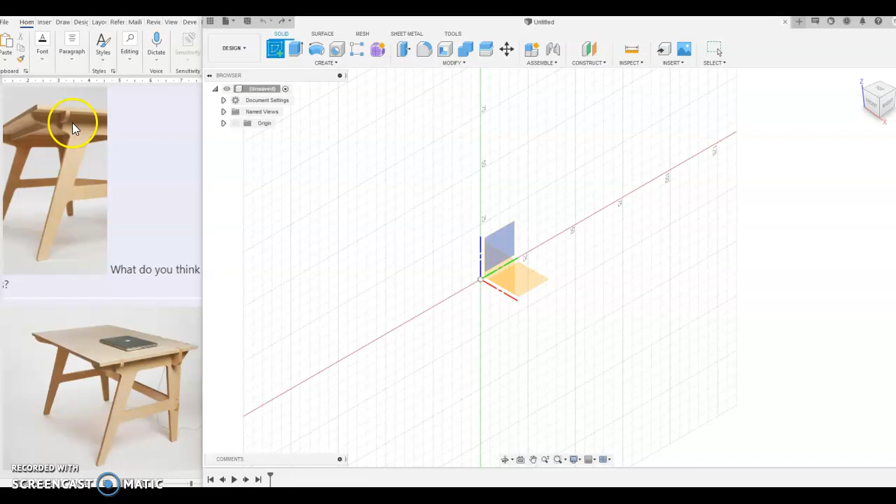Going to have a go at modeling up a plywood desk. This is designed for CNC. We're just going to do a basic leg first and see what we can add to that.

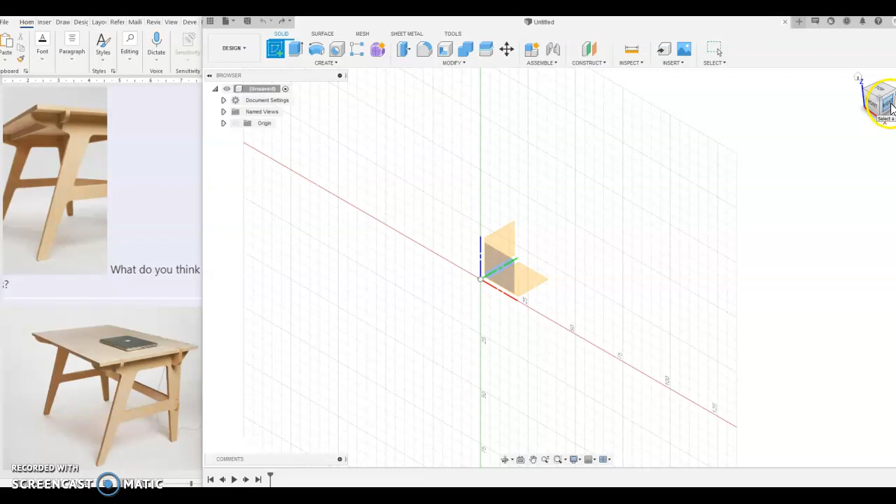I always like to look at when I start a new sketch where I'm modeling. So as a new part, we need to choose the plane that we model on. If it's going to be a desk and it's going to be the side, you want to try and choose one of the sides. So this is the right view, so I'd choose that one there.

So it's sitting in the right orientation to start with. Next thing I'm going to do is do a rectangle to the size of what the legs are going to be. I selected line type construction line, so it's going to be a dotted line here.

Now I need to know the overall height of that leg. So it's going to be the leg height minus the thickness of the top will equal the overall height. So if I want my height of my project to be 720, and it's a 15 mil top, I'm going to put in here 705 millimeters because that will equal overall the size that we want.

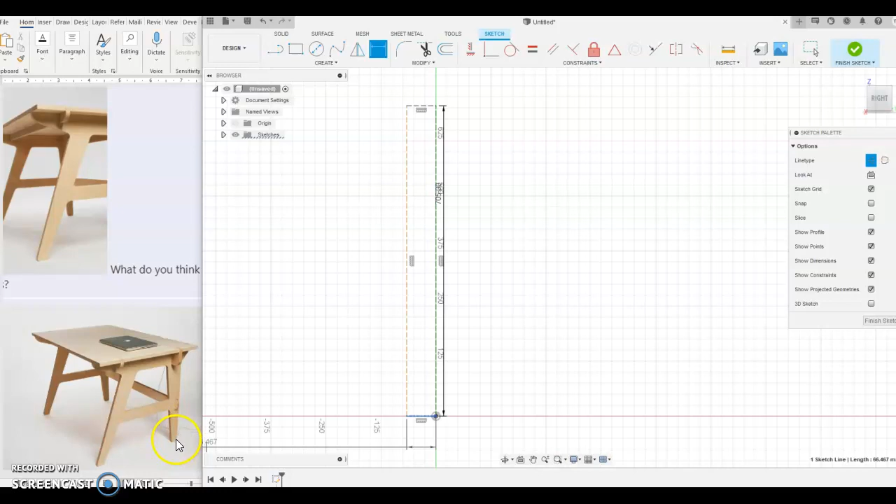I haven't really put much thought about the measurements, but we can come in and change them later. The next thing I'm going to do is the overall width of our project. So from the bottom here to the bottom at the front of the leg, there might be some overhang, so overhang the back a little bit and overhang the front.

So let's think about 500. Don't want it too deep a desk. So our project will sit in there.

I like to press escape and bring my measurements down to the right point, just so we can easily go in and modify them later. So we can't extrude that yet. We need to draw the profile in here now.

You can see this project here's got a very straight back leg and it kicks out a little bit at the back. It's just slightly hidden in there.

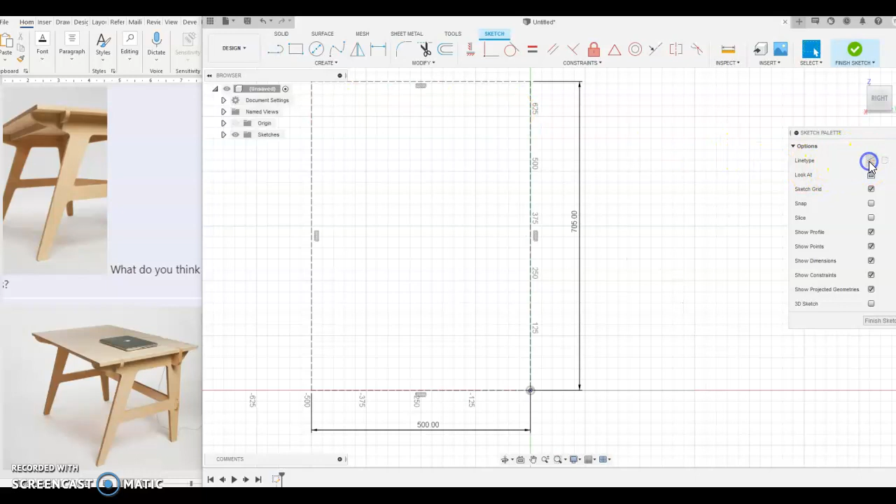So what I'll do next is I'll come in and I'm going to start kind of here. This is a straight leg. Press escape and turn off my line type as construction. So up, and then it's going to kick out at the back like that.

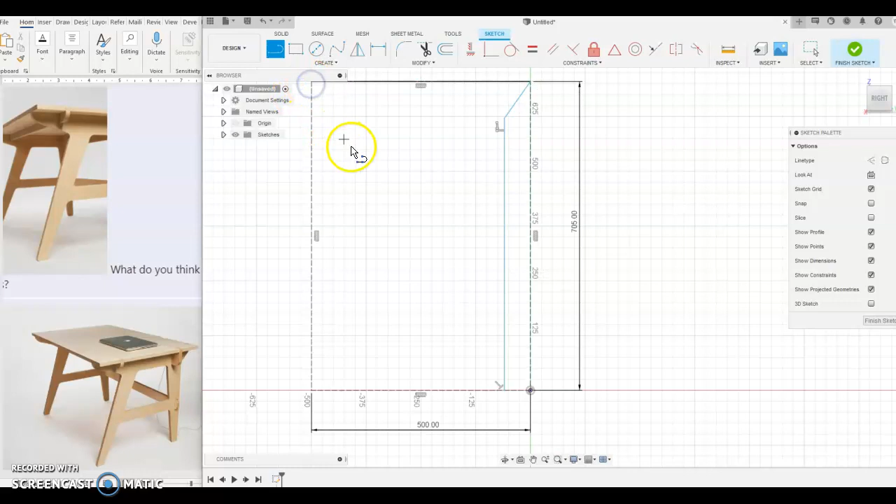We can move these still, so nothing's connected in properly yet. It's nice to be able to do that, especially when you're making like a project like this, which is meant to be aesthetically pleasing. A line to the top, you can see that that's gone black now, so it's not the dotted line.

I'm going to come down, straight, and then I'm going to come out. So I'm just trying to block it in roughly to what I see at the moment. So I'm not really designing, I'm just copying this one.

This one here, I've decided to do it slightly different, so I'm going to delete that line and I'm going to just come down slightly and then over, because I don't want to round this top edge, but I want to round this one later.

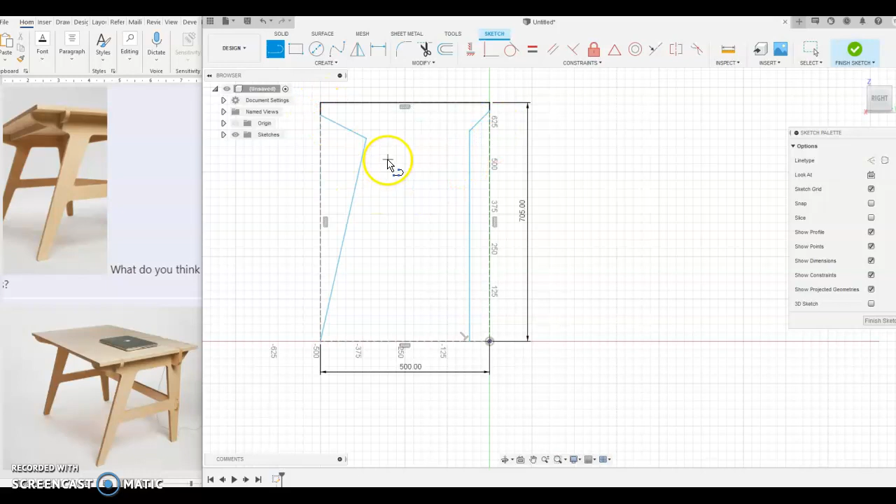Now, the next thing that would be logical for me would be to put a construction line in between those 2 points there, and then with my horizontal constraint, I'm going to click that, and that kind of levels things up.

Next, I'm going to put in a little flat there. Sorry, I still had construction lines on, so I'm going to Control Z until I undone that, and I'm clicking there, and we'll go up.

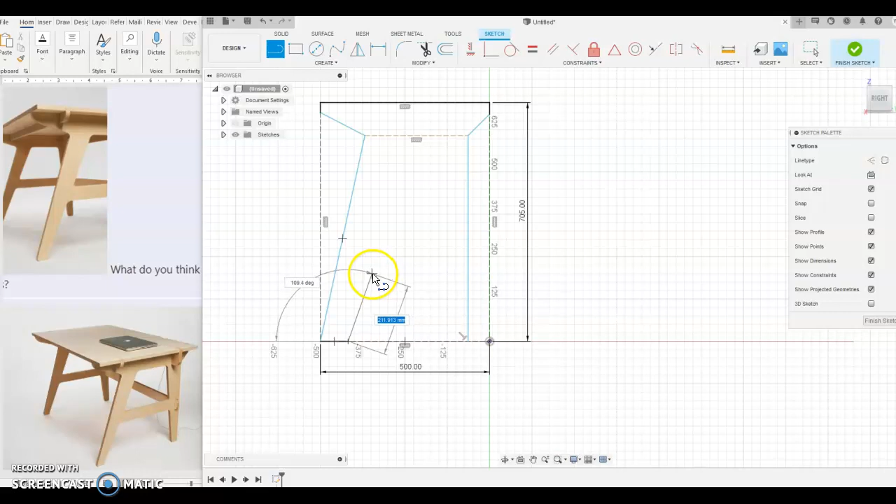So you can see as I pivot around, the parallel constraint automatically connects. There are those two little lines in here. I'm going to go straight like that, and now you're getting those smart constraints pop up. I'm going to come straight down, and then I'm going to join the two at the bottom. That will go dark blue because it's been our profile.

Next thing I'm going to do is I'm going to draw this kind of internal part here.

You can still move that until you've got the parallel constraint. If you don't get the parallel constraint, you can block it in, and then add the parallel constraint to those two there, and that still moves. So we're going to use the collinear constraint between those two. Now those two move together. Those two don't move together, so we can use collinear in there too.

The last thing I would do for this sketch is go into the dimensions, and I'm going to click between those two lines. Now I'm not too sure what this is going to be like, so let's try 80 mil. We can come back in later.

I've just noticed on this here, what looks good is it tapers down from thick here to thinner here. So I'm going to delete both of my parallel constraints. It's still collinear though. I'm going to delete the measurement here, and I can do this here.

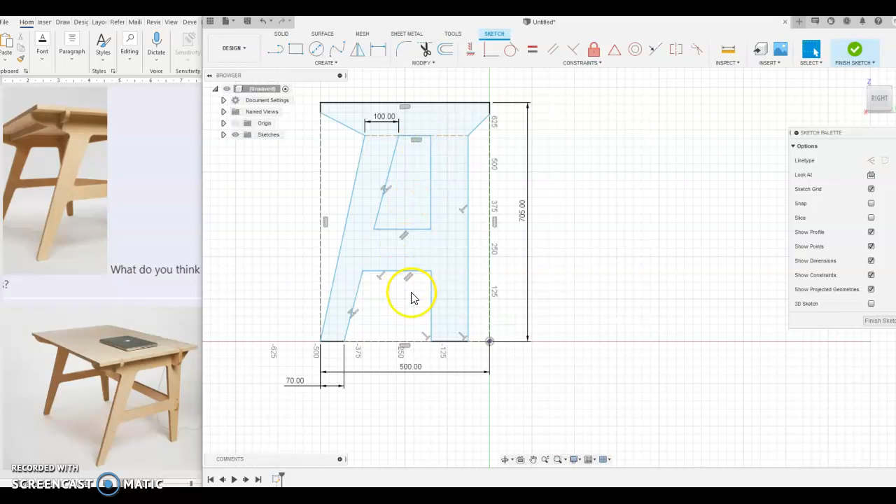So I need to delete my parallel constraint here. Let's see what that does. I'm going to delete this constraint and this constraint, and put the collinear back on between those two.

So that angle's there, so we're going to click from the top to there. Doesn't like it, press escape, try again. Let's say 70 at the bottom, and let's see if I can get this one to happen this time, 100.

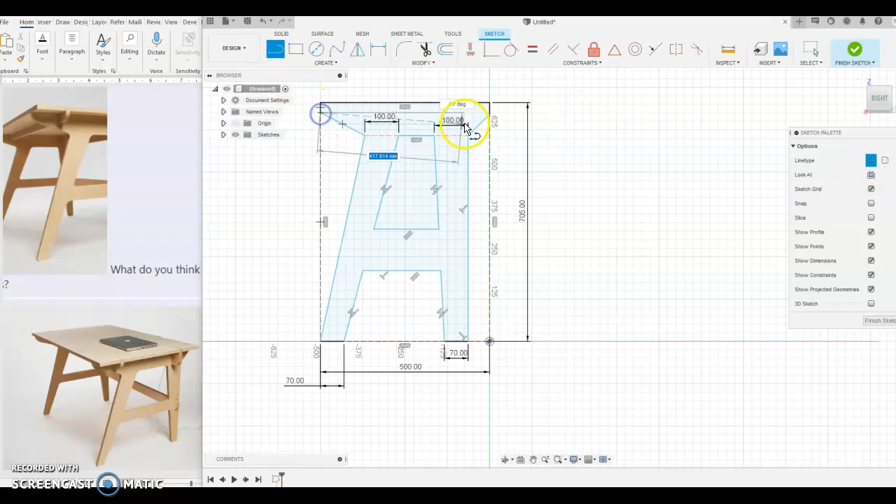So we're looking pretty good here. Let's think about what size we want this one. We can put this in as a construction line again, just so this is horizontal across. And then we can dimension how far down that sits. Let's say 15 millimeters, that's going to give us some structural support. We can perhaps move this up a little bit.

So 600, let's say 620. And I'm pretty happy with that design for now.

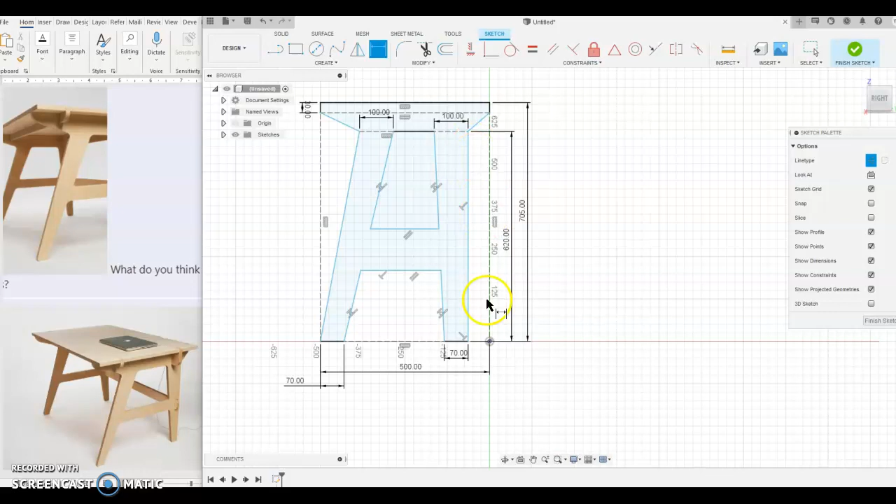Generally you have this little overhang here, so it would clear a skirting board on the back of your project. So let's say 460, you don't need much overhang there. And let's finish that sketch and see what that looks like in 3D.

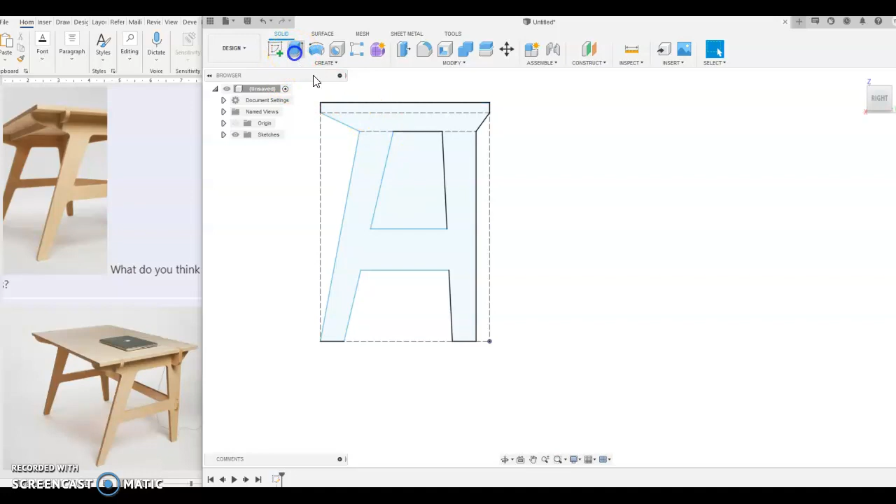I'm going to go 15 millimeters. It doesn't look like much, but that's the size plywood I've got. We'll have to check what other type of plywood we've got as well.

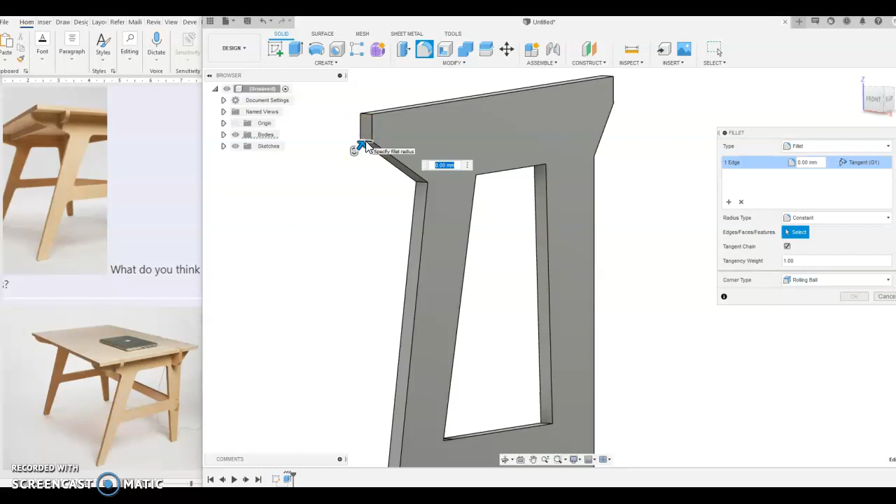And then I'm going to go in and use the fillet tool to fillet the edges. So this one here and the back is a very generous radius. Let's say 50, let's go 100. That looks pretty good to me.

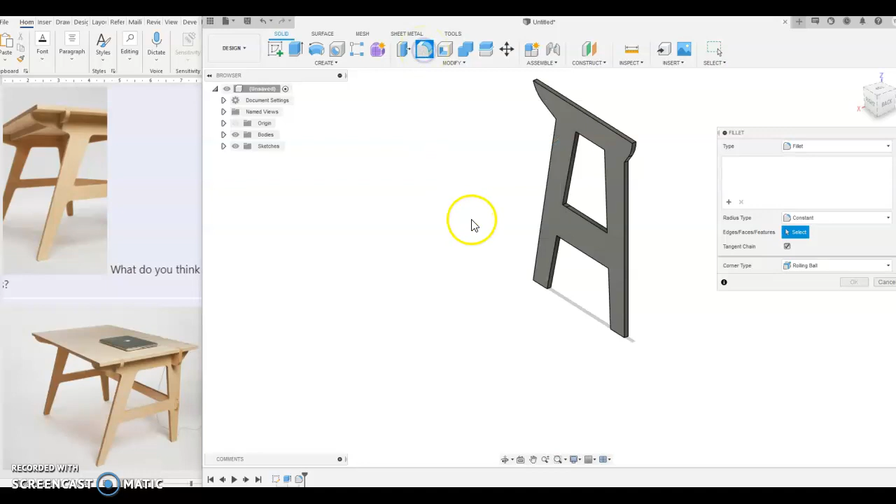And then the rest we can probably make them the same. So you can see a very small radius on the bottom. So we made this 70. So let's say, oops, 30. So we'll make all the bottoms the same. Let's say 20.

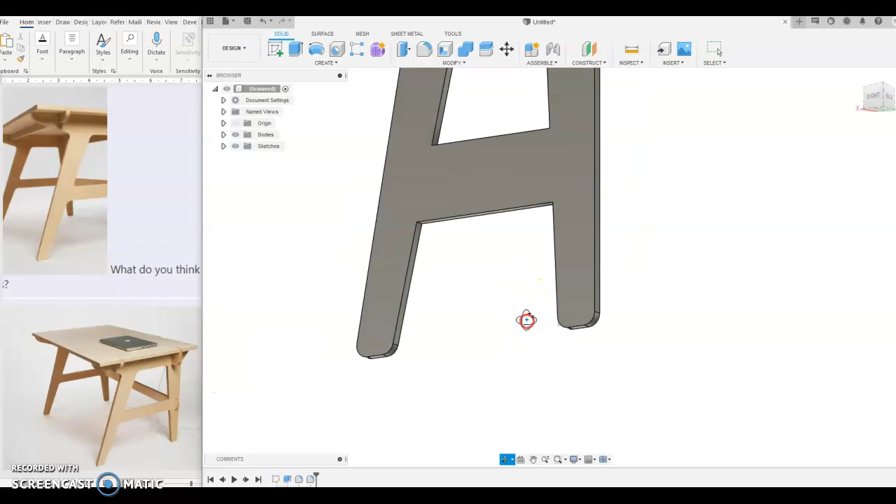And then all the internal and external fillets for the rest, I think, should be pretty much the same as these ones here.

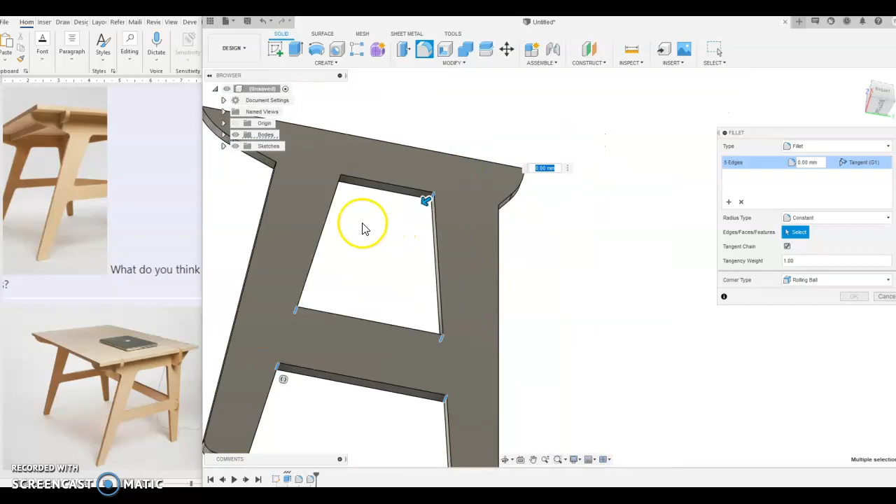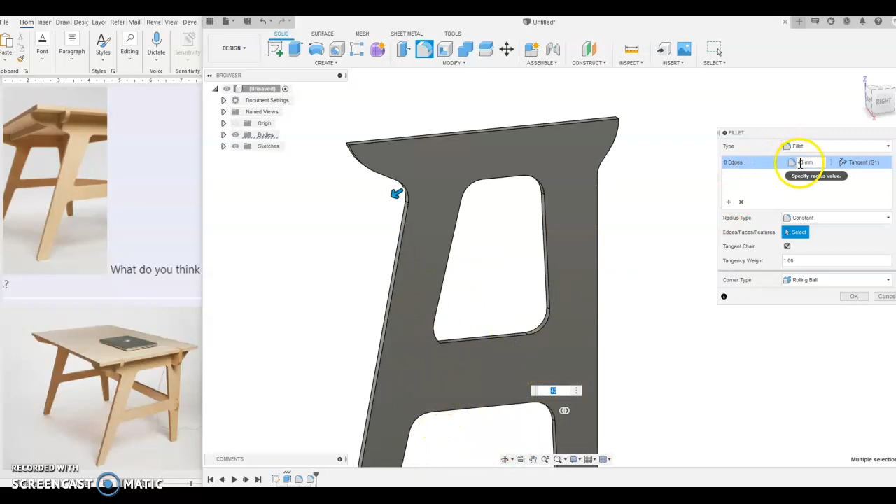So I've made them 40. I'm not sure if that's going to look good or not, but maybe less. It looks a little bit, yeah, that looks better to me, so I'll change it to 20.

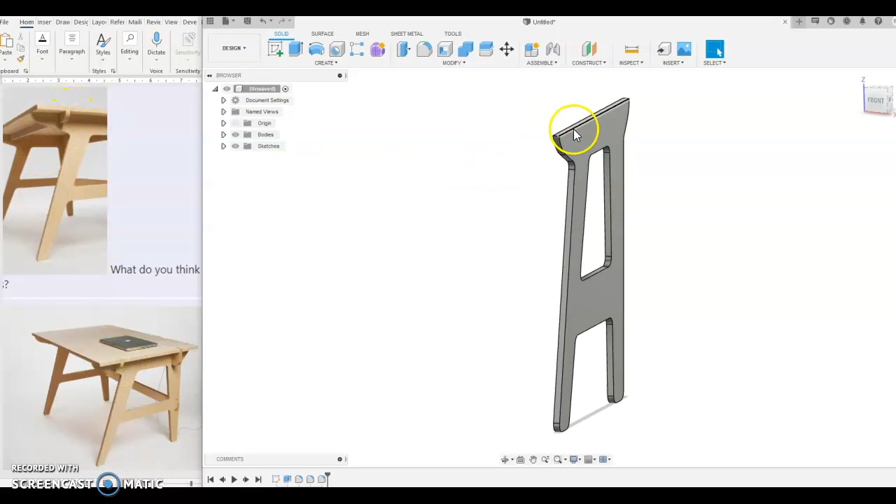That's how I would draw the side of the leg. We need to make sure we save that component, and then we can duplicate it when we put it into assembly. The last thing I probably need to do is think about where it's going to connect to these cross supports with the structural strength. So we can do that as we start to assemble. We can come back and edit this one.